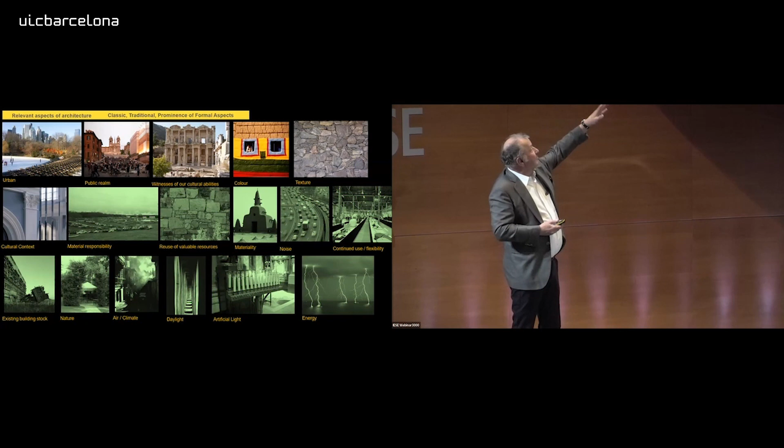Always, the public realm, that defines history. It also defines the cultural ability of a society, which often doesn't speak well for our societies right now. What was a society able to create? So public realm, cultural, the color and the texture of architecture - these were the basics architects worked with.

We developed further since the last 40, 50 years. We think also about architecture in context with nature, air, climate, daylight, artificial lighting.

And today we even develop further. We think about material responsibility, the reuse of materials, the materiality, qualitative aspects, noise, flexibility, reuse of buildings. How can we create less waste? How can we use the buildings longer and better? And then about using the existing building stock, urban mining, reusing of buildings, reuse of materials.

And then also how can we produce in the buildings our own energy? How can we get them ideally off the grid? And that is suddenly - architects are depending more and more on the interaction, the iterative process with engineers, the interdisciplinary working. It's becoming more complex, and we depend more and more on outside knowledge to help us develop that.

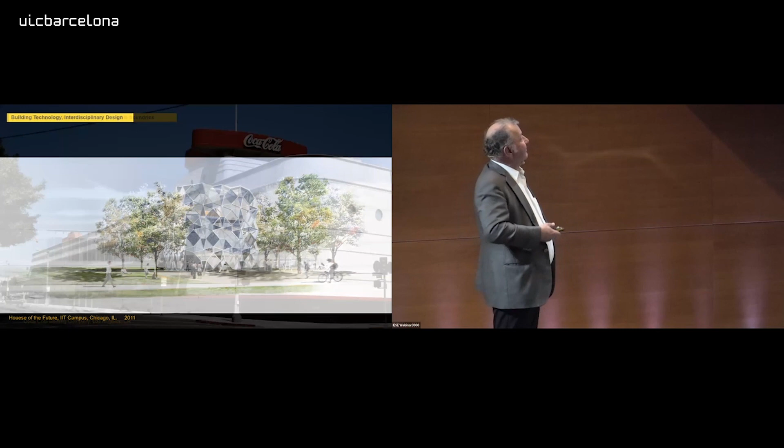Building technology, interdisciplinary design - that was something we did for the IIT campus in Chicago. They asked us, what could be the building of the future, the independent building of the future, off the grid, using only existing materials. This is just an example.

If you don't have content in architecture, if you don't look into structure, sustainability, usability, whatever, it becomes very formal and superficial. It's fun, but suddenly you can make it a boat, you can make it a ship, you can make it advertisement. And that's probably for nowadays a little bit too lame.

We work very closely with engineers in architecture. From the outset, already in the competition, we work together with our engineers - structure, sometimes urban specialists, sustainability, energy, climate, landscape, lighting design. It's a process from the beginning, it's not something we design and then give to the engineers and say make it work. It is a very interactive, interdisciplinary process from the beginning, and for that you need good engineers.

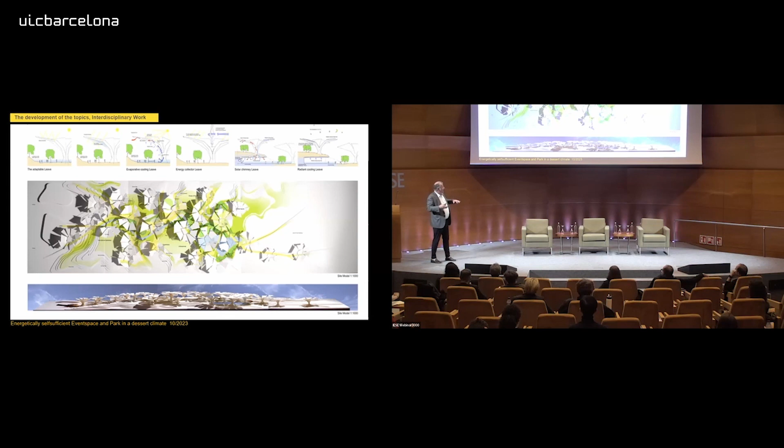Here's an example that was fun. We worked here with Transsolar and Neil Thomas from Atelier One in Britain. We worked on big umbrellas. A client wanted in the desert an off-the-grid open park with cooler temperatures and exhibition halls below ground. We found out even in the desert, 7 meters below ground, you have a very stable temperature of roughly 17 to 20 degrees, no matter what, day and night, 24/7 throughout the year. It works quite well, and we were able to develop these big umbrellas that cool down the air. It was fun, obviously never built.

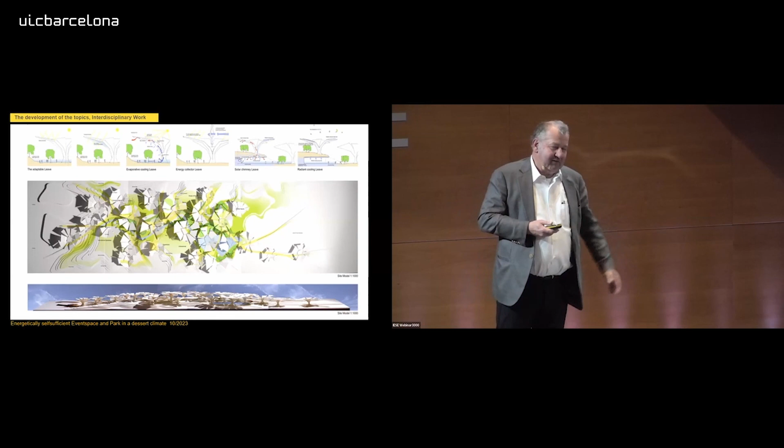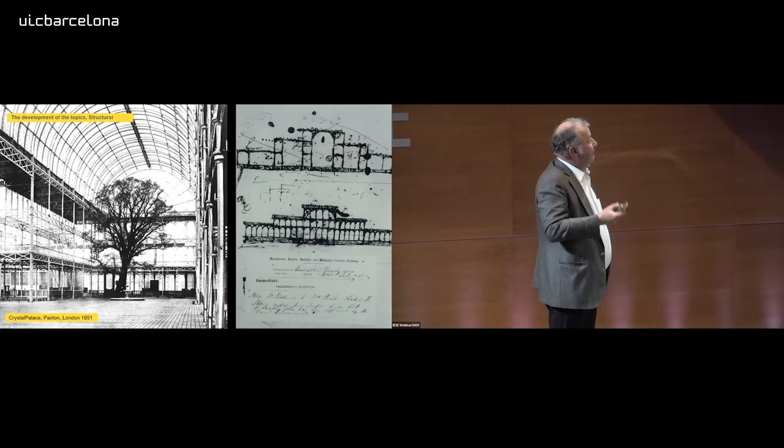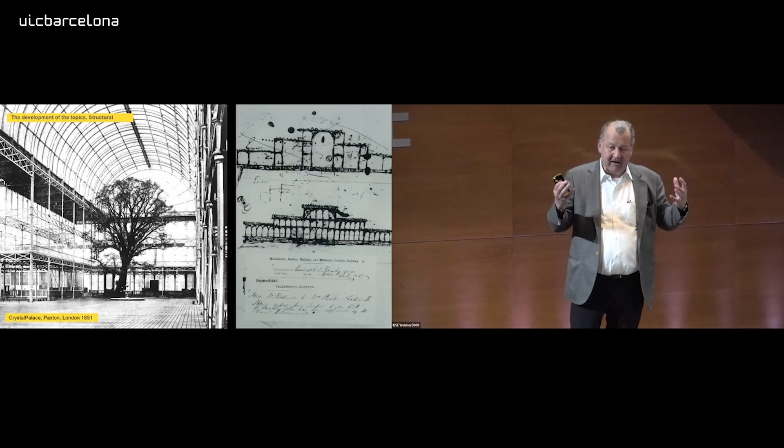If we go further, structure became a very prominent element in architecture. It expressed the architecture - Eiffel Tower, Crystal Palace. There was a new aspect in architecture that dominated the appearance of buildings. It made it very prominent. And it's always been in architecture that way: until we mastered a subject, it became the dominant element in the architecture, and then once the subject was mastered, it played its role and something new became dominant in architecture.

Here, also a different way of structure. Structure as a cultural element.

Now I want to talk briefly about a building my father did with the engineers Jörg Schlaich and Frei Otto.

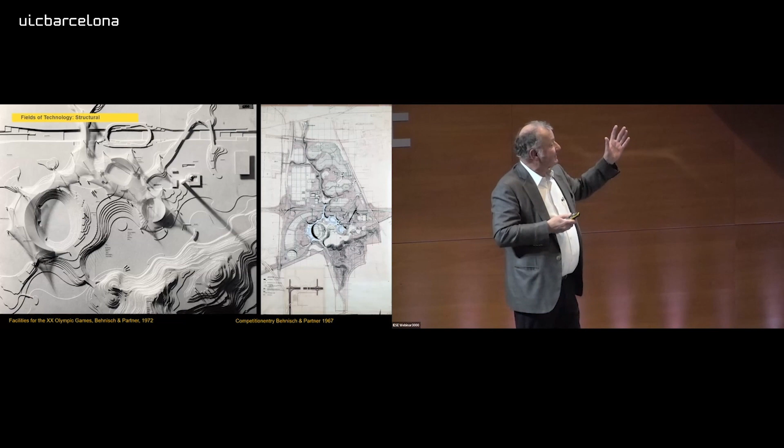The facilities for the Olympics in Munich. I'm showing this because this was right at the brink of something new, very new. It was when the computer started becoming an element in architecture. They had won the competition, and for a very long time, the state, the clients didn't know if they wanted to build the roof.

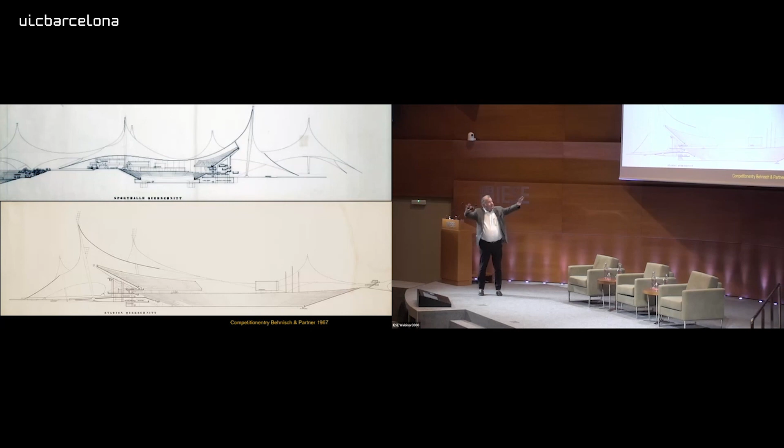They did different studies with different engineers and architects for alternative roofs. When they did the competition, and this is a competition drawing, the roof was never important for the architects. It was about the landscape, the Olympic facilities in the landscape.

Pretty much to the end of the competition, the story says, they said, we need a roof. We want open. They looked at earth stadia, amphitheaters. In Poland there were these earth stadia. They looked at that and said, that's what we want. And then they said, yeah, but it rains occasionally, we need a roof.

They used stockings in the model and just had this tent roof. They didn't know how it worked. Then it took a while, and just 3 years before the Olympic Games, they decided to build the roof.

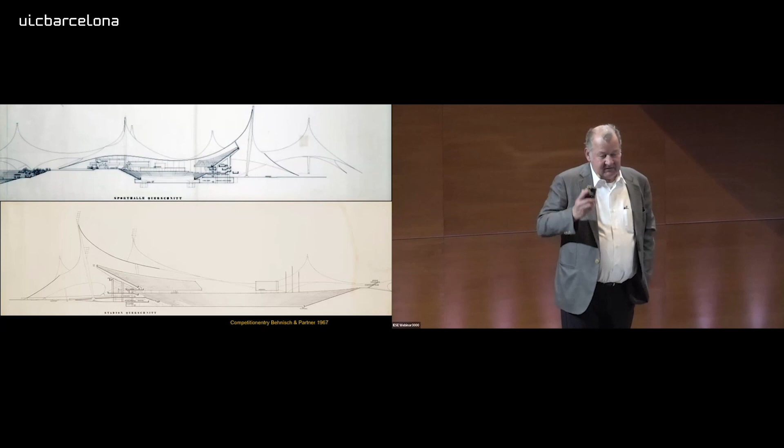The roof - here are the chain models, or physical test models, by Frei Otto. Some of the facilities were calculated by Frei Otto with these chain models, and some were calculated by Leonhardt and Andrä already with computers.

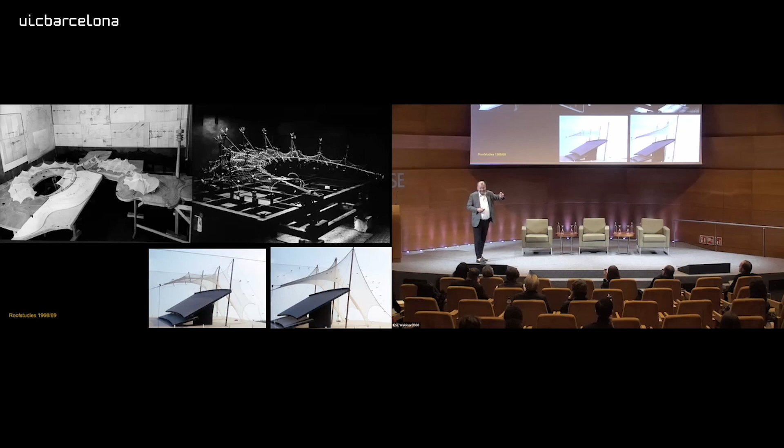They had a company in Stuttgart at the university, someone writing programs, computer programs for that, which were later used by Lockheed or McDonnell Douglas for airplanes.

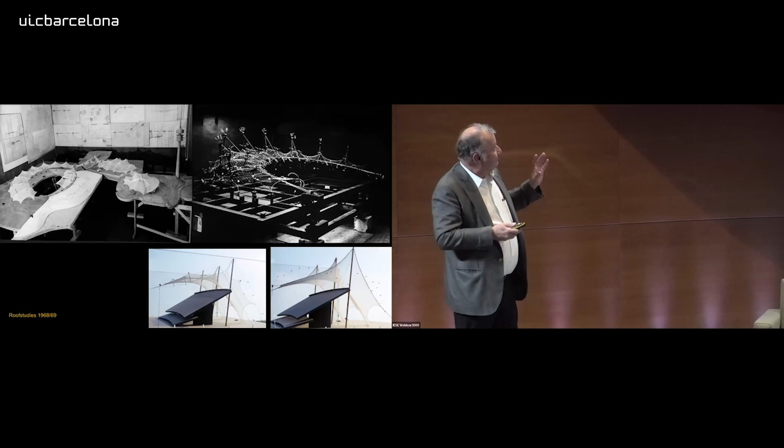And the challenge was, if you look at it, they had to build the tent at the ground. The net was built at the ground. They had to measure over 1 million knots by the millimeter, so that when the tent is pulled up, every knot is at the right place, and you don't have overtension in any place.

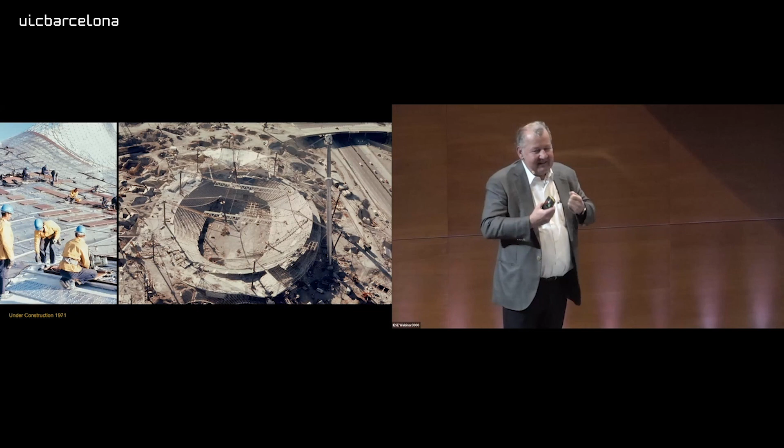So it was really amazing what they did in this very short time, and it worked. They couldn't over-engineer it, only by a little margin, because it would have gotten too heavy if they over-engineered it. They couldn't under-engineer it, obviously.

They had no experience whatsoever and had less than 3 years to do it. And they managed to do it. Just thinking about it, right now to build an airport in Germany takes 12 years or something like that. And they were able to do that in 3 years.

That's pretty amazing. But that was a very close working relationship between architect, structural engineers, and very good clients. There were 3 politicians from 3 different parties. There was Franz Josef Strauß, very conservative, Hans-Jochen Vogel, SPD, socialist, the mayor, and Willy Brandt, social democrat, chancellor.

And these 3 said, okay, we dare it, we'll do it. We make this decision. Politicians who were willing to take the risk. And it worked. It was worth it.

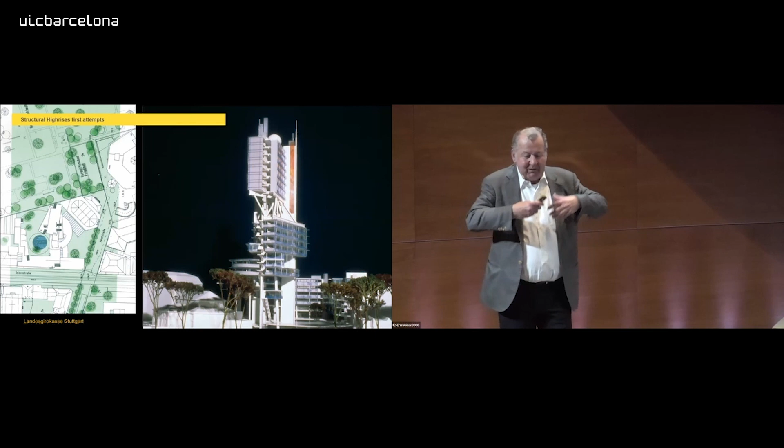So why can't we do a high-rise building that is dancing on a foot or on a toe? Playing with the structure. So we designed that. We won the competition, started working on it, then it was stopped.

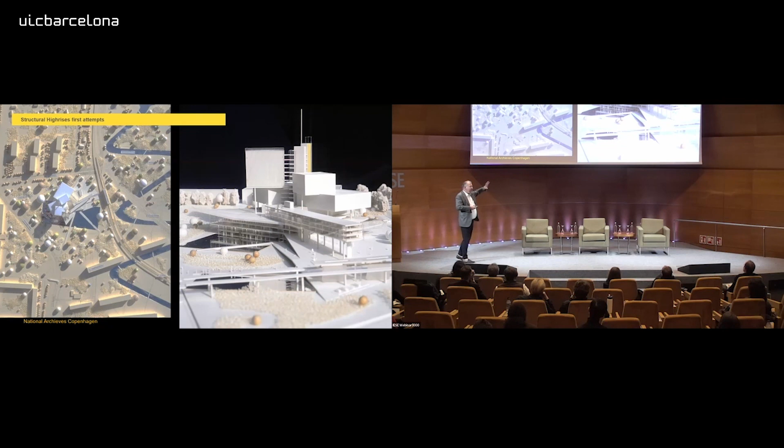The next one was even wackier in a way - the National Archives in Copenhagen. You don't see the size of the building, but the archives alone were more than 90,000 square meters. It's a huge building, huge.

And we won the competition, we designed it. We had the structure, a steel structure, already in place. And then they stopped it. There were elections, a very conservative government, and they stopped all foreign projects by foreigners. Boom, zack. And then, finally, we were able to build it.

Interestingly, though, we won the competition with a rather almost lame block, without this high-rise part, just a block. We won that competition, and then we were lucky after reunification in Germany.

They wanted - this bank, Norddeutsche Landesbank - wanted to merge with the Berlin bank, but the Berlin bank went under in a scandal, so they couldn't merge. So they needed more space. And they asked us if we could add another floor, and we said, nah, we can't really do that urbanistically.

But we have the idea of a high-rise building there. And they asked how much will it cost? We calculated something. They said, okay, we'll go for it.

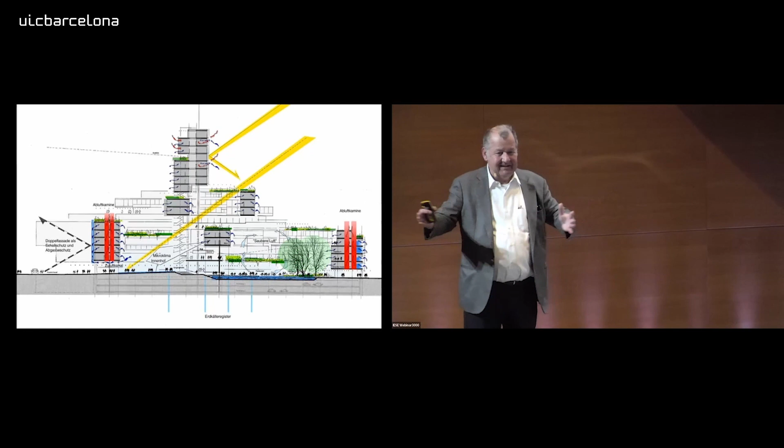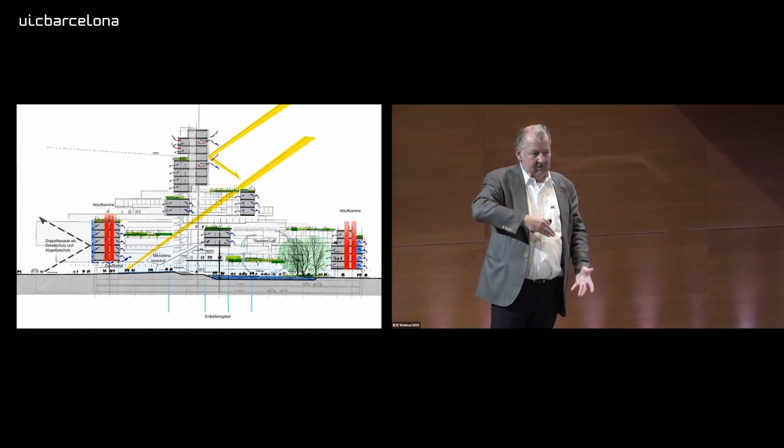The building itself is very sustainable in a way, technically. It has geothermal wells, not very deep. And because they built the subway next to it in the 60s, the groundwater table can't move. It's caught there, so we have a huge seasonal storage under the building, which we heat up in summer and cool down in winter, counterbalancing it. That covers 70% of the heating and cooling energy, but cooling is only the tower. Here there's no cooling, it's all natural ventilation through chimneys.

It's a very low energy building for that time. Today we could do better, with natural ventilation, with a double facade here. These are the chimneys of the floors, they are located here. But let me get back to the structure because that's interesting.

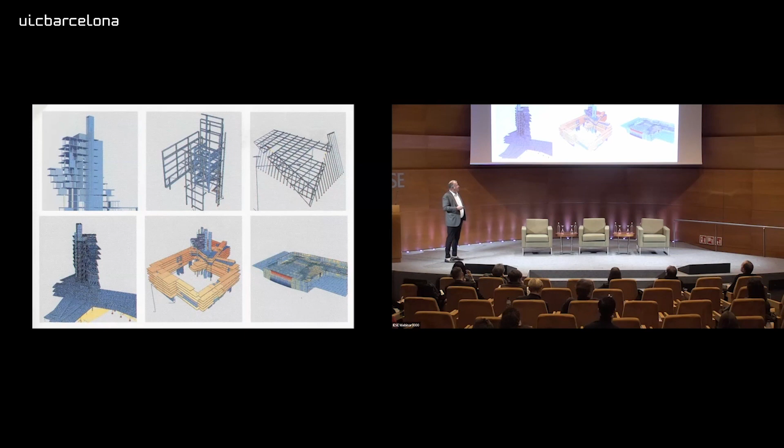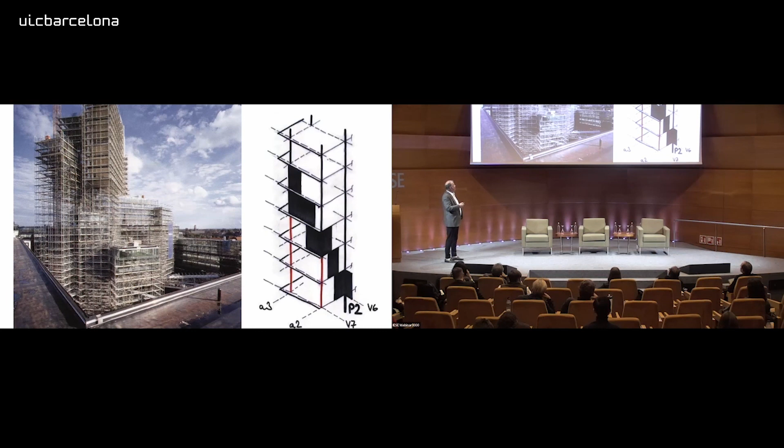The building is structurally a concrete composite structure, high density concrete. And since it cantilevers so far, it has these shear walls pulling it back. Here you see the shear walls pulling it back. What is interesting is the whole thing is balancing on these two columns here.

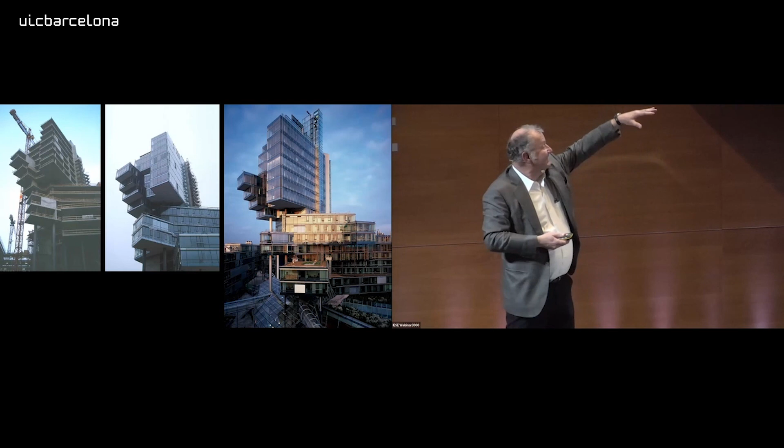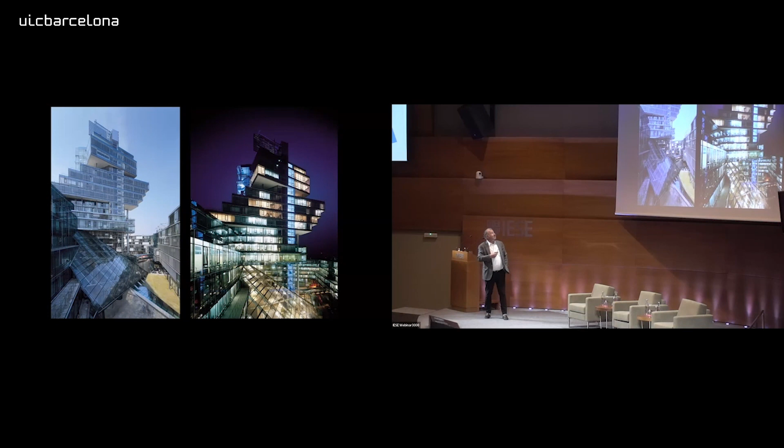The structural engineers always told us, you need a little bit more weight in the back, you need to add a little bit of floor in the back or the bottom. It's really balanced. These two columns need a stable temperature because it's cantilevering so far that even if they only extend by 4 or 5 centimeters, the pens would roll off the tables in the high-rise building. So it's a very stable temperature element in there, they can't extend, shouldn't extend. Here you see how they say, oh, we need more weight back here, or we need a little bit more front here.

Now I'm going away from structure, to another aspect. This is the Genzyme headquarters in Cambridge, Massachusetts. We worked here with Buro Happold on this building. And the building is a low energy building, comparable.

But it doesn't really matter how much energy it uses, because this is a power plant, and we were able to use the cooling cycle of the power plant, which normally just dumps the heat in the water, to heat and cool the building with absorption chillers. So it's a net zero building, to be honest, because instead of heating up the river, we heat up the building. That's the only difference. So that's an aspect that is very important.

Where is the building? What is nearby? We've done something similar in Bavaria with a city hall, where close by is a commercial laundry that creates a lot of hot water. We can use that hot water to cool and heat the city hall instead of dumping it in the rivers.

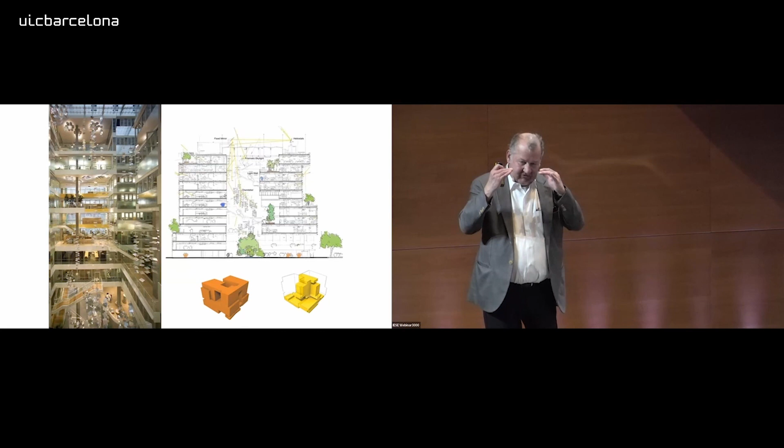That's the building, and the building itself, because it's such a deep floor plate, has a natural daylight enhancement system. We have 7 heliostats on the roof that catch the light and reflect it into the depth of the building. The quality of daylight, though, is the change. It's not just because it's daylight - you can artificially reach almost the same quality of light as daylight, but the change, the clouds, the trees, the colors changing, that's different.

Once you reflect daylight with heliostats, it's canned light. It's static, it doesn't change anymore. So we developed these chandeliers in the middle that turn in the air return of the atrium, changing the light sensation in the building. So suddenly you have the feeling of daylight again.

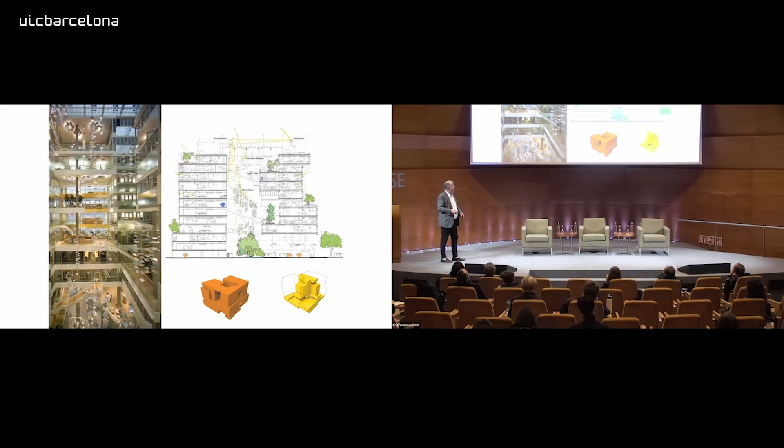Another project, also done with engineers, friends of ours, very interesting. It was a competition, we didn't win. They wanted a drawbridge in Dublin. Now everybody thinks drawbridge like that - we said, nah, it's not really good. It's a lot of power you need, a lot of strength, you have to over-engineer it just to pull it up. How can we let the bridge dance to the side, move without effort, like a dance?

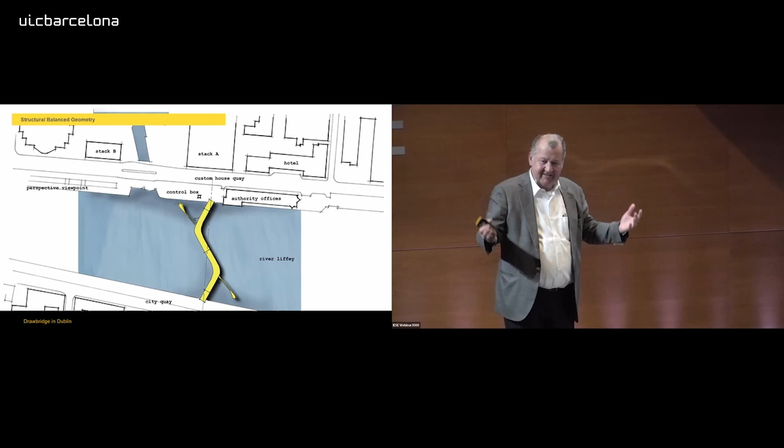And so we developed a bridge that turns to the side, dances to the side, and also balances by dipping these counterweights in the water, balancing it out with the water. You see it here.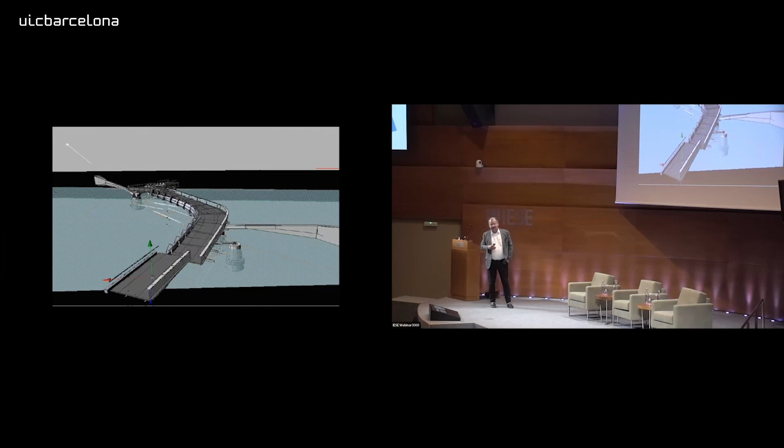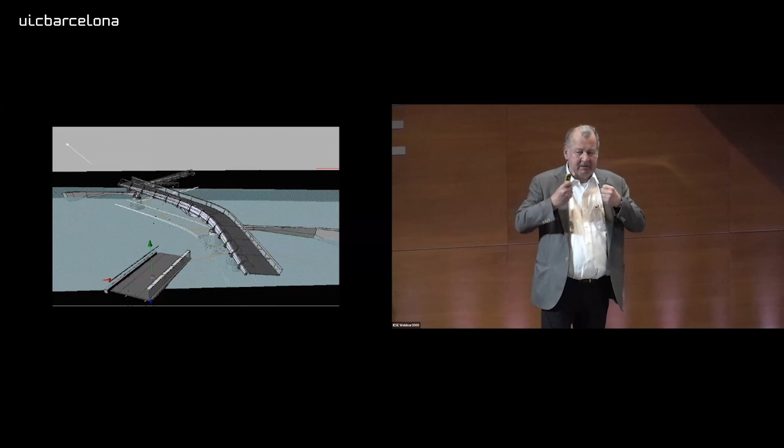That was old and crude, not rendered. But the idea was, can we move a bridge without power and effort? It should work with a push of a finger to move it, not have these powerful things. We didn't win though, I think they didn't believe us. But it was fun to do, with very good engineers.

Another one. Now I'm talking briefly about wood, the qualities of wood in architecture. This is the conference hall of the World Intellectual Property Organization, a United Nations organization for the protection of brands and intellectual property.

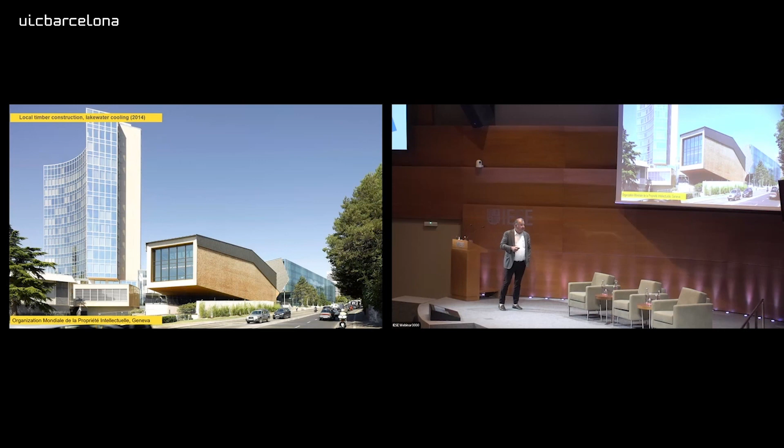We did this administration building for them, and this one. When we started, we were in the midst of designing that, 9/11 happened, and suddenly bomb blast became an issue also there. How can you do that? That's why this wall is here.

We decided to do a wooden structure here, a conference hall for 1,000 people, for various reasons. One reason is we had just finished a parking garage below the building when they decided they needed a conference hall, so weight was a big issue. We also wanted to do a very sustainable building, so wood from the area, not more than 100 kilometers, was an issue.

Third, a conference hall is usually used at a maximum of once a week, so you don't want a building mass. What you want is a climate that slides—it cools out, it heats up, it doesn't matter, because right before a meeting you can easily heat it up or cool it down, without a big building mass to carry or pull along. So wood is ideal because it's light and doesn't have building mass. And the last aspect is wood is structurally far better than any other building material we have.

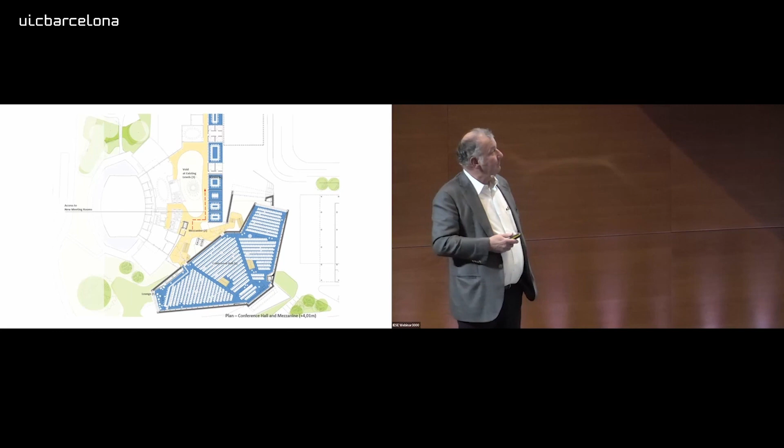The hall itself is for 1,000 people. It's a free span, and here it cantilevers 40 meters. No other material could have done that without a huge effort. With wood, it wasn't a problem because we created a closed box.

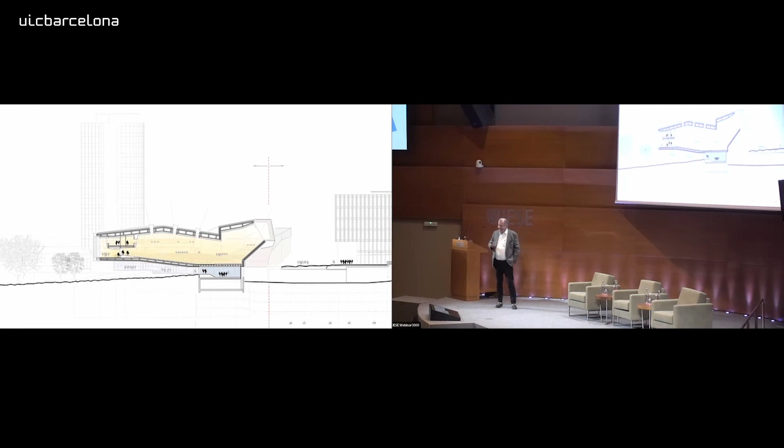What you see here, the open elements, we blow air through for the air conditioning, so it's always kept dry. This is a free cantilever—you don't see it in the section, but there's a concrete column that holds it, and then it cantilevers free. Another huge advantage of wood is bomb blast: it's far better than steel, glass, brick, or concrete, because it's elastic.

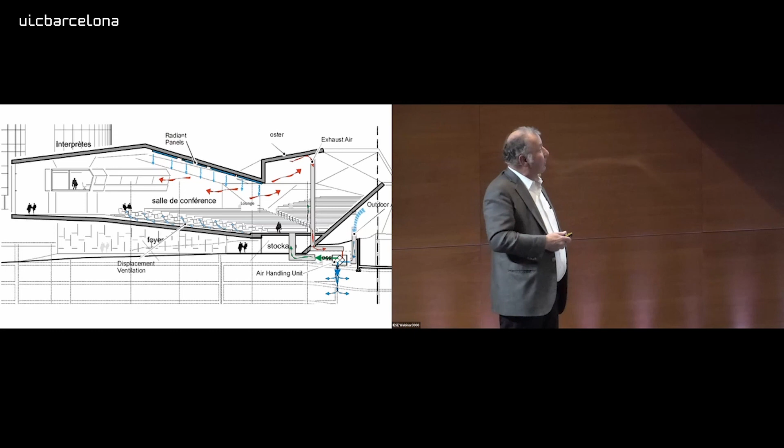This building is also cooled with lake water. Lake Geneva is very deep and has low temperatures at the bottom, so there's a water tube going there. It's a full CLT structure with only steel joints, partly prefabricated and brought there. So everything—the structure, the interior, everything—is wood in this building.

What you see here, these Sputniks, we designed—we designed the tables, the chairs, these elements. In conference halls, the ceiling is usually cluttered with loudspeakers and all this kind of stuff, but here it's all hidden. You only see little cameras and some microphones hanging.

The tables and chairs we designed because the depth of the table is a given, and the depth of the seating area of the chair is a given—they move automatically. The only thing not a given is the depth of the structure of the chair. By designing new chairs, we were able to save 2 centimeters, which gave us one more row, 89 seats—just from the 2 centimeters of the chair.

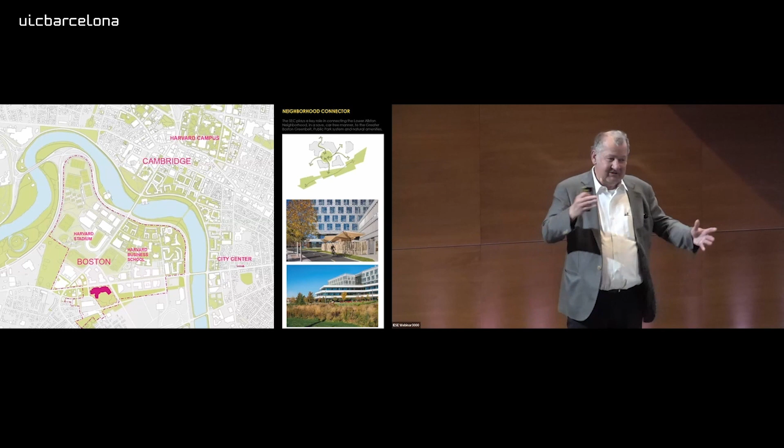And then 2008 came. And 2009, they put a stop to the project. And we had for 3 years to babysit the basement because it had to be kept an open construction site. And 2011, they came back to us and said, we want you to proceed, but totally new program. Completely new design, on the old structure. It was incredibly expensive because we had to change the structure below. A nightmare, but a very good client.

So what you see here, originally it were 4 buildings, 1, 2, 3, 4. And you see here the old cores still - stairs, elevators, everything - because they want to be able to expand here later on. But this alone was as big as all 4 before. So it's a major building.

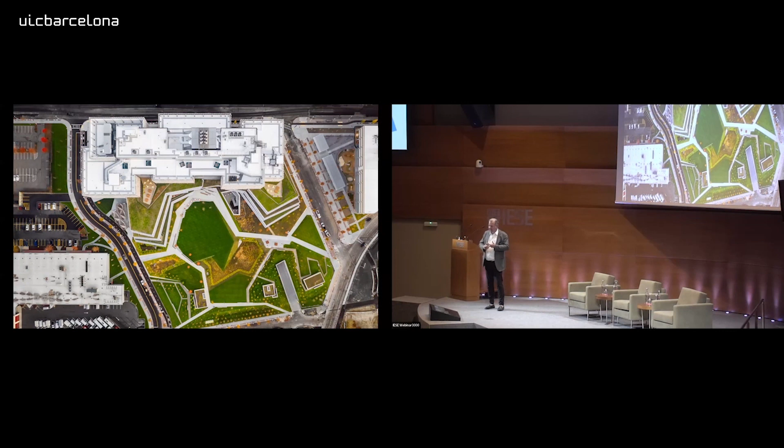It's a school, SEAS, School of Engineering and Applied Sciences. It's a very broad approach to School of Engineering. When we think School of Engineering, we just think machinery, structural engineering, or whatever. Here we have medical in there, bioengineering, robot programming, clean labs, wet labs, dry labs, computing, whatever. So it's a very broad, interdisciplinary approach to engineering.

And that's the building. Harvard said, we want a building that is very sustainable. Before they stopped the project, we even had test drilled for deep heat mining there. We went 4 kilometers down with a drill to see if we could produce energy, if we could get enough steam to produce energy. And then after 2009, sadly, they put a stop to it. It was too risky.

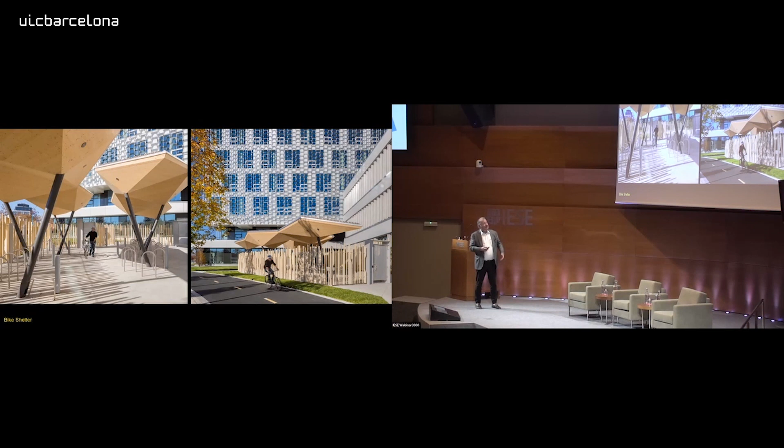But here's the bicycle rack, a wooden structure. The most complex bicycle rack we at least ever did. But it was interesting, and we wanted a contrast. It's part of the landscape.

Here, this is the school, the teaching part. It's 4 floors - 2 below ground and 2 floors above ground. It's altogether about 60,000 square meters, the building.

What they wanted is, as I said, a low energy building, a high-tech building, not low-tech, a high-tech building, but low energy and as efficient as possible. So we have different things there.

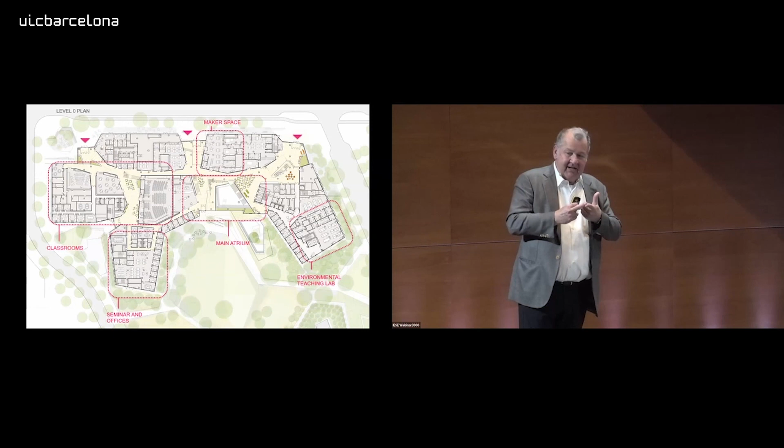It's a living building challenge was the basis. That means for all interior material, we had to check the supply chain. No poisonous materials were allowed, no materials based on poisonous construction, and so on. We're only allowed to get 15% of the materials - and this alone is LEDs, lighting, and building management system. There you have already your 15% of poisonous material used up.

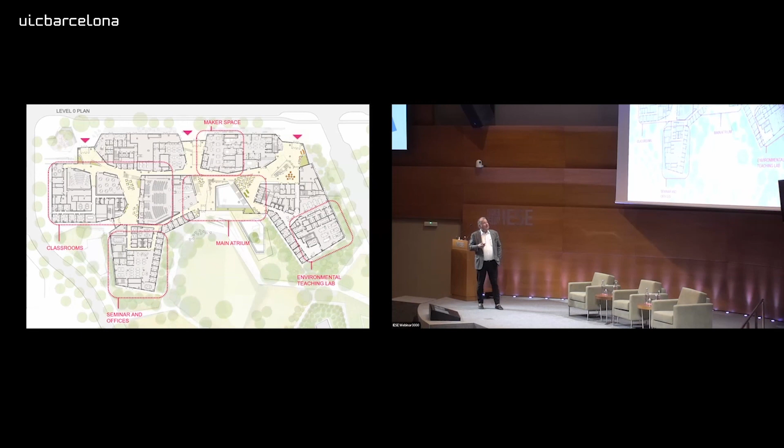So living building challenge: low energy cooling, low energy heating, and daylight enhancement. I'll come to that, I'll explain that in more length. These are the teaching labs, the maker spaces, the main atrium, which is also important for the climate system.

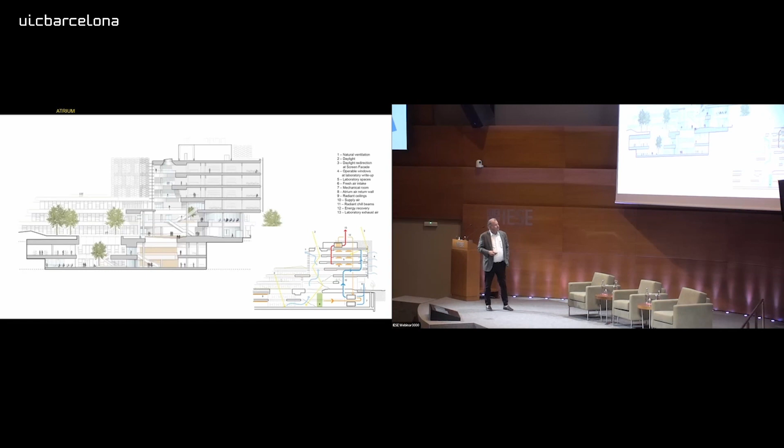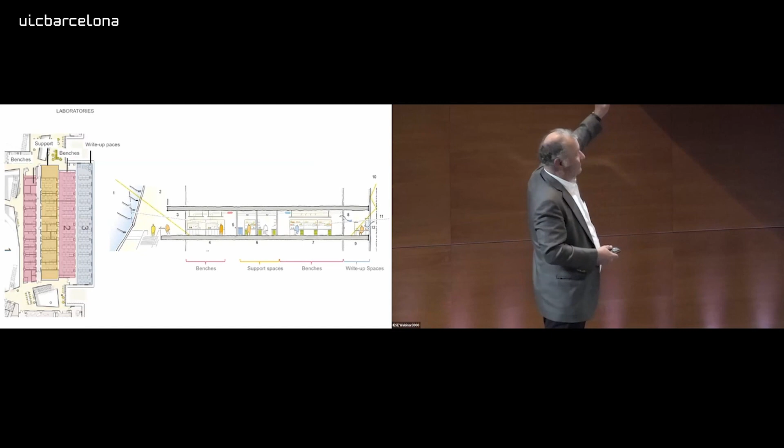These are research labs. That's a computing lab. Most of the times people want these rational labs, these very technical labs like these ones - that's what most people want.

And here we had a teacher who said, why are labs always so boring? Can't they be different? And we say, sure, happy to. And so we developed these kind of labs for them. They wanted more openness. These are the robotic research labs with office spaces. Here you see regular labs, wet labs.

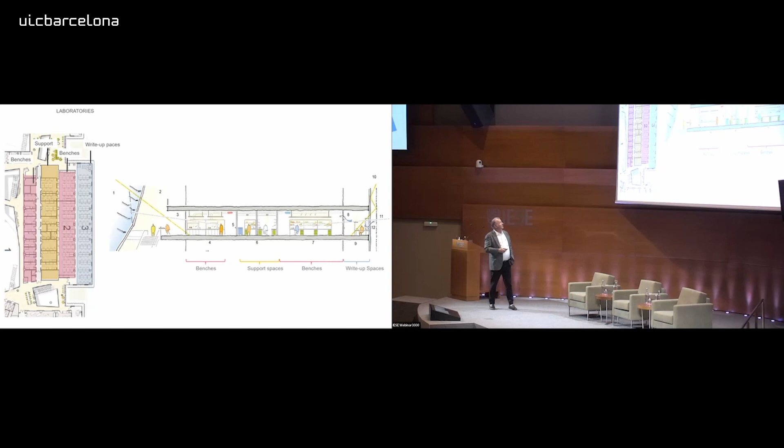So it's not a guarantee for sustainability. The living building challenge is more difficult because it doesn't look only at quantities, it also looks at qualities - light, daylight, materials, water usage, there is everything in there. Far more complex than LEED, for example. The building is LEED Platinum, but also living building challenge.

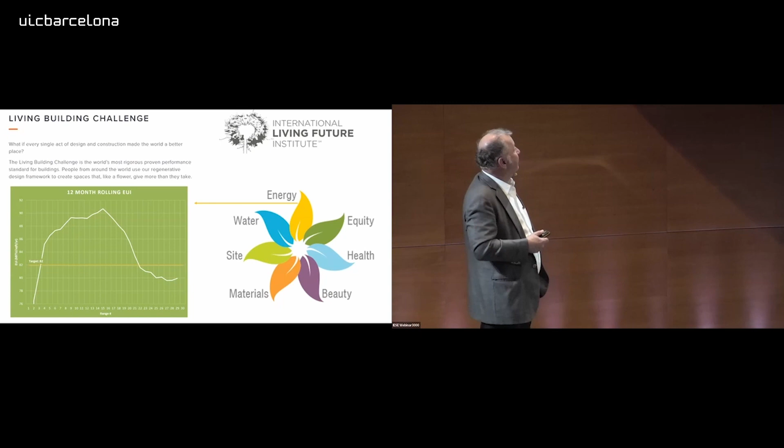The energy consumption of the building was way below what we had expected. The water cycles, I don't go into that, but it's flushing toilets, it's watering the green, the outside. It brings the water to the HVAC system and so on. So hardly any water goes in the channels.

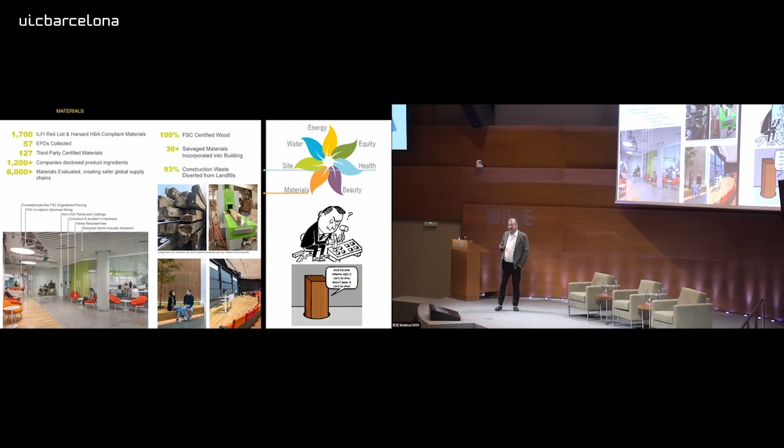Reclaimed wood, reclaimed materials. It seems not much, but on a building that size, it's a lot. Generally, laboratory buildings are energy hogs. They are pigs, they use a lot of energy. To save 50% of energy in a residential building is great, but doesn't make that much of a difference. To save 30% of the energy in a laboratory building makes a huge difference.

And now let me talk briefly about the shading and daylight enhancement system. We all know that shading is a major issue in buildings nowadays, because cooling in summer uses a lot of energy. And we know, for example, a building 3 degrees Celsius cooler in summer just doubles your energy use. Just 3 degrees. So whatever you can do to avoid overheating is good for a building.

We normally use a lot of movable blinds. The movable blinds are a good idea because you can tilt them, you can reflect daylight in. What we tend to forget is movable blinds have - let's say an office building of 40,000 square meters has around 1,000 motors for the movable blinds. Each motor is about 60 watts, so we are talking about 60 kilowatts. That means you can't even close or open them all at the same time without the whole electricity failing in the building. So we tend to underestimate the complexity of it, not talking about breaking, repairing, fixing, and so on.

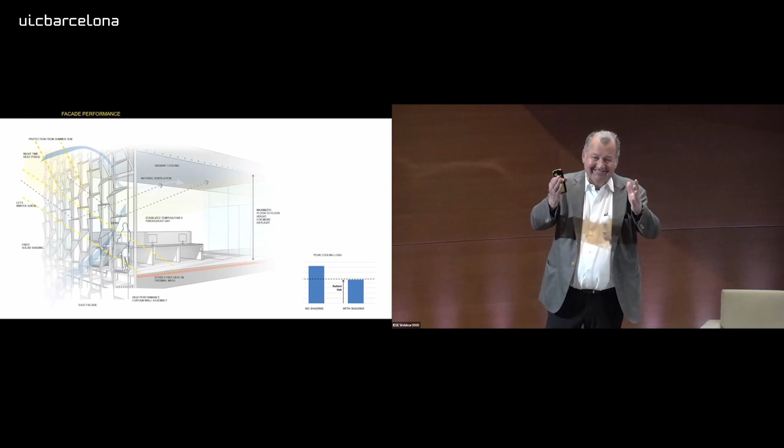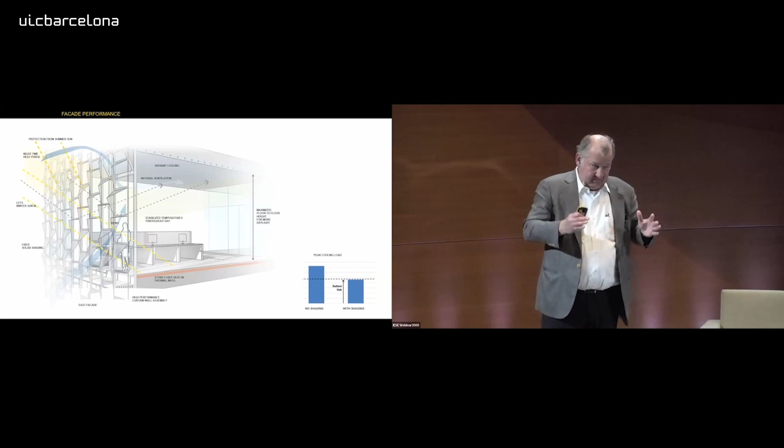We designed that and optimized it. And the next challenge is you want it in a way that you still can look out, the visibility to the outside, because movable blinds usually block out your view to the outside. So we wanted to keep the view to the outside, not disturb it too much, and as I said, reflect the daylight in.

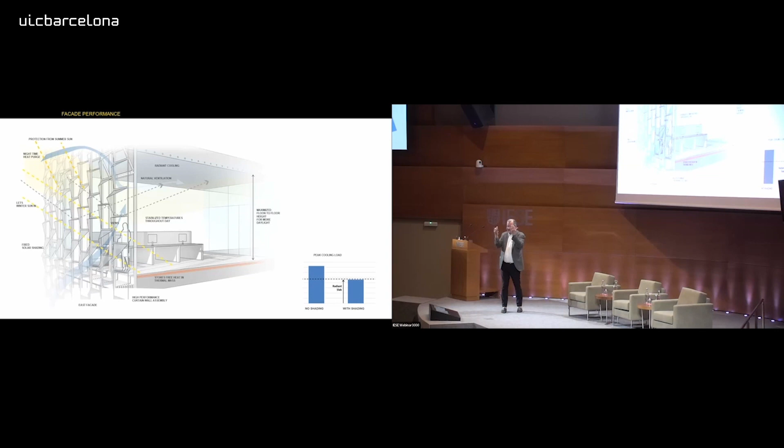And very important, contrast is very important. That means when you look out, you don't want bright and dark next to each other. We all know that when we look in summer through a window with a closed wall left and right, it's very bright. So contrast is important - how can we minimize it? We worked on that in many different ways.

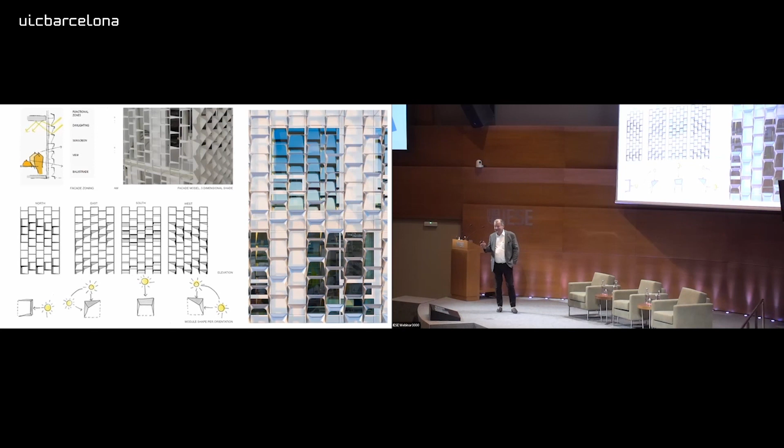We approached it first with folded metal elements. And then we noticed when we went through the construction documents, we had 14,000 of these elements. So we couldn't do them by hand - we could, but it's not fair. So how could we approach that?

So depending on the side of the building, the direction of the building, and depending how open we want it - because where you look out, we wanted to open it up - but you can scale it. If you open it up, you have to make it deeper. So it's scalable. And architecturally, we wanted it also to be pleasing - I mean, why not?

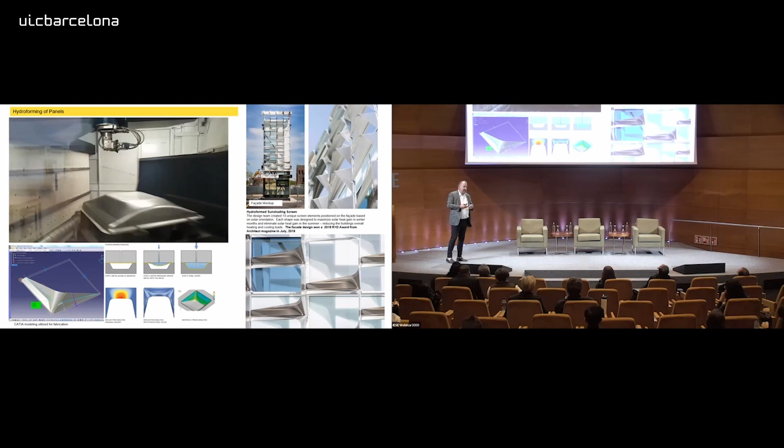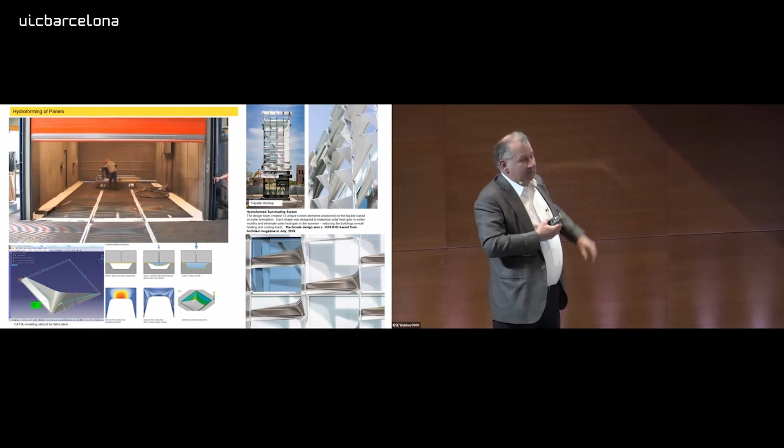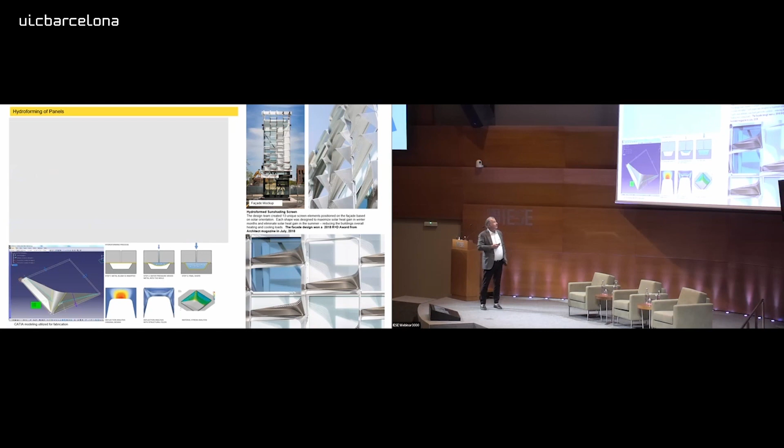And this is the production process. We optimized it in a way that we needed only 4 different forms, and the rest is done with laser cutting. And this is the result, how you can look out, and it works very well with the sun shading. It's funny, or interesting - it is not a complex device, but it's a very complexly designed, engineered device. The device itself is harmless, but the engineering was very complex, and it works very well.

So as you see, nowadays, if we want to address our challenges, buildings don't need to become very high-tech, but what they need is to be very high-tech designed, very knowledgeably designed. They are more complex in design, but if we do it right, less complex technically. Thank you very much for your attention.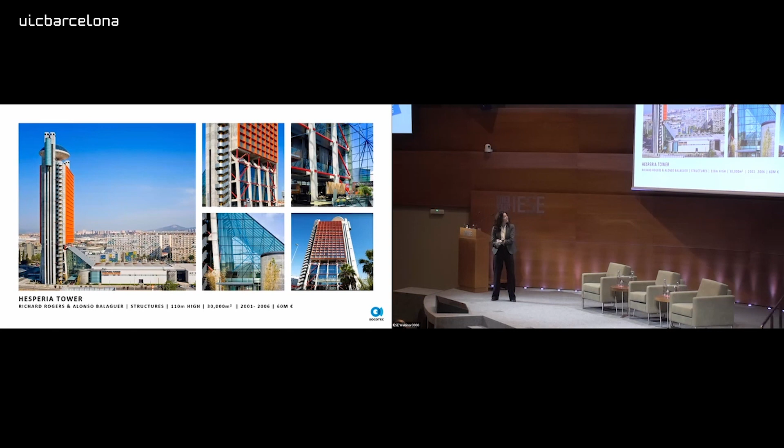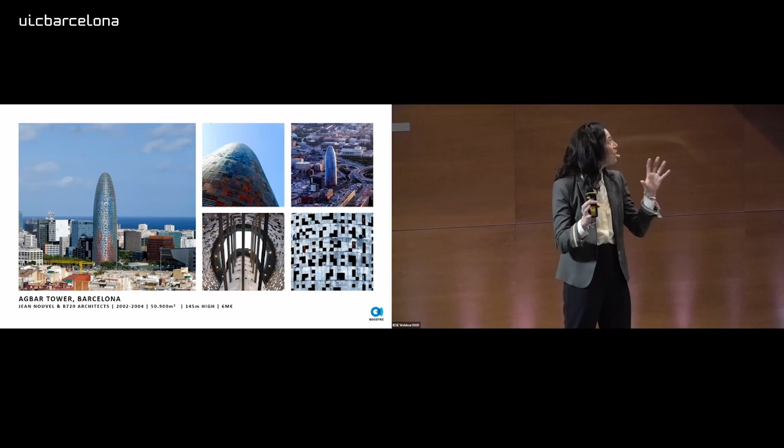I personally worked 3 years on this project, hand by hand with the Jean Nouvel Atelier. It was really amazing for me personally, designing all the windows and understanding the best position of the windows, of the light. It was really, really amazing.

This is a work that we did for Richard Rogers, the Hesperia Tower, also an amazing building. That was another crazy building.

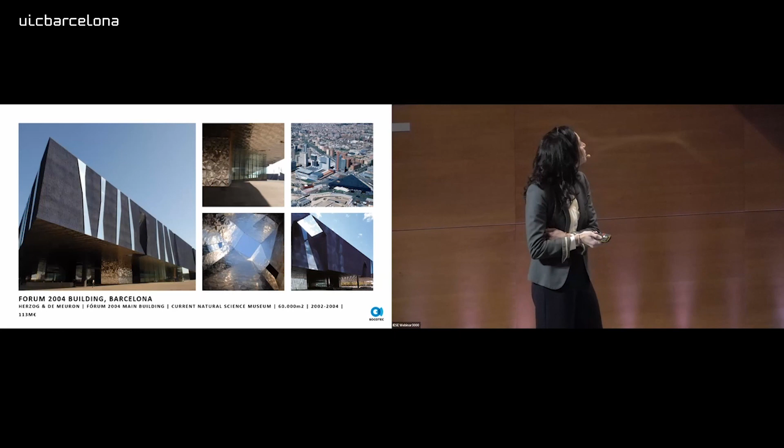And experience for our teams in Barcelona, the Forum building with Herzog de Meuron. This slab was 36 meters, so it was really an important engineering and architectural collaboration between architecture and engineering.

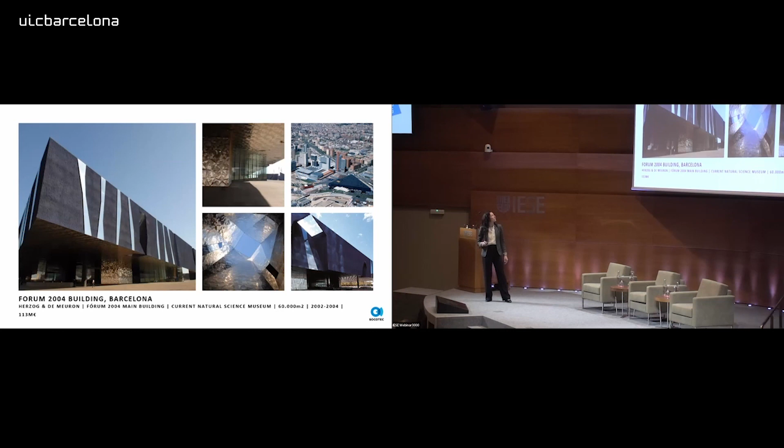It's hand by hand, day by day, arriving to the optimal structures. This is another hotel here in Barcelona with Dominique Perrault.

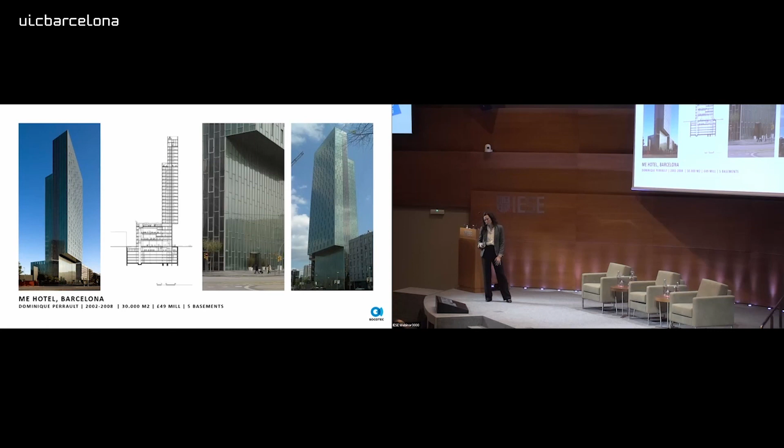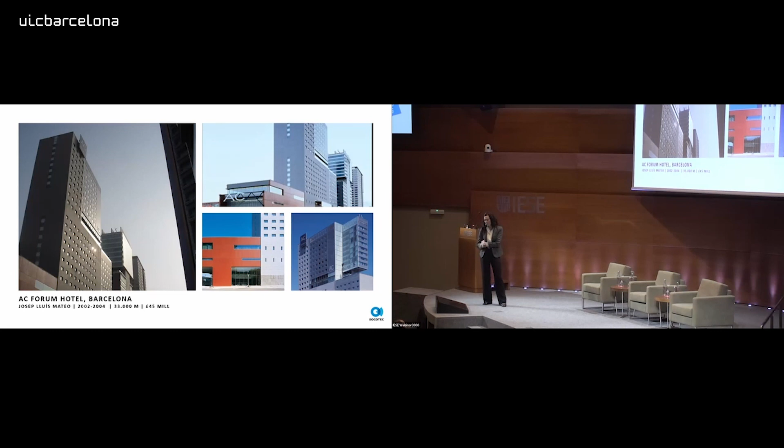And the Justice City project was in collaboration with David Chipperfield, and another hotel here in Barcelona with Lluís Mateo, another office.

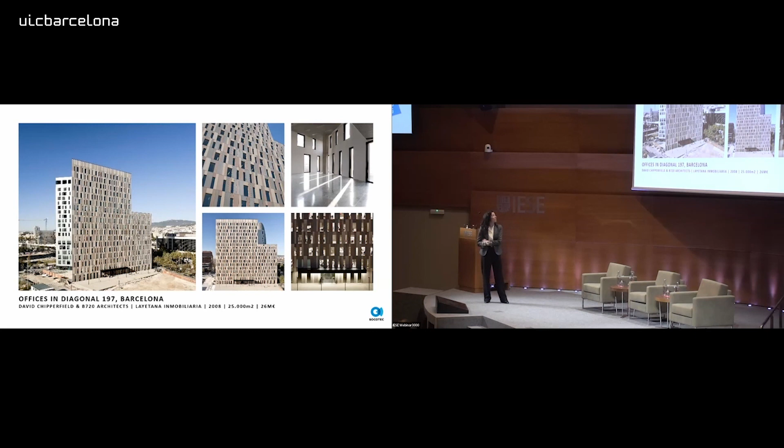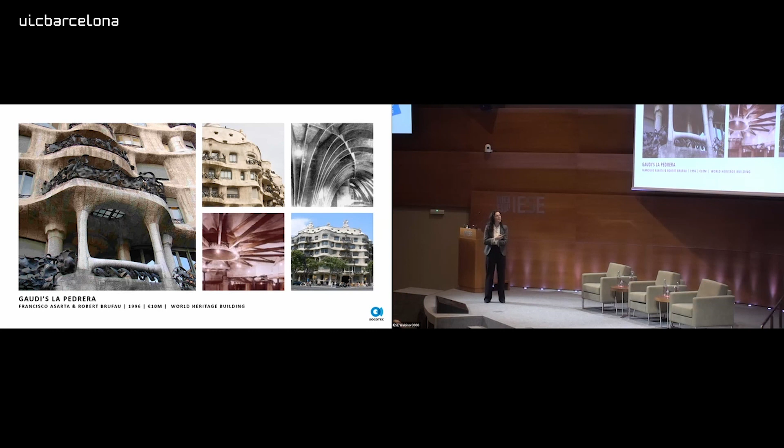Then we did a lot of projects in heritage and refurbishment. As you can see, we had a lot of fun in our work, from the Olympic Games to around 2005. We also did several footbridges, and this is a project we currently have under construction in Malta with Zaha Hadid.

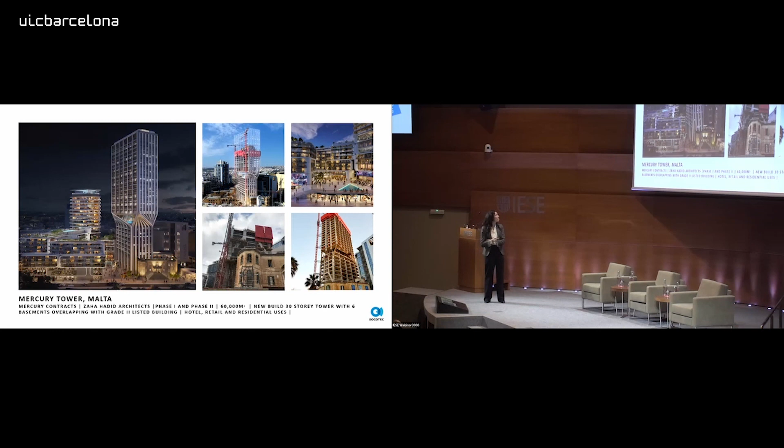Now we have new challenges. In the last 30 years, things are changing a lot, and we need to face all together, architects and engineering, the challenge of the transition in energy. So now we are trying to approach every project in a holistic way.

30 years ago, there was high tech, there was a material, and there was a geometry. The materials were more or less the same, steel or concrete, and we worked over the geometries. But nowadays we need to approach the project in a really holistic way with all the engineering specialties, so structures now become a visual, acoustic and thermal protagonist of all our projects.

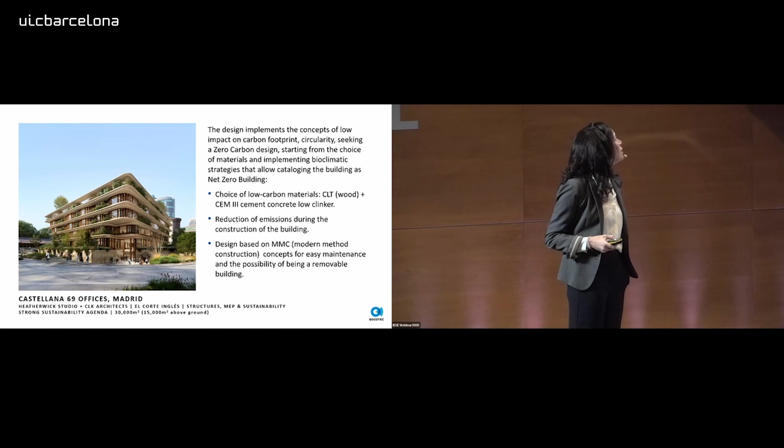It's in Madrid. The architects are Heatherwick Studio and CLK Architects. It's really challenging work for us. We are implementing the concept of low impact and circularity, and we are trying to arrive at zero carbon design.

We start from the choice of the material. Finally, we use CLT wood everywhere, and the cement of the concrete is low in clinker. And we use a lot the design based on MMC.

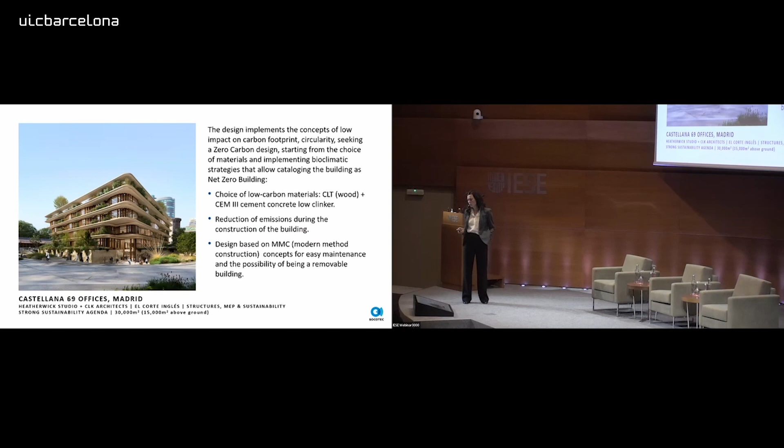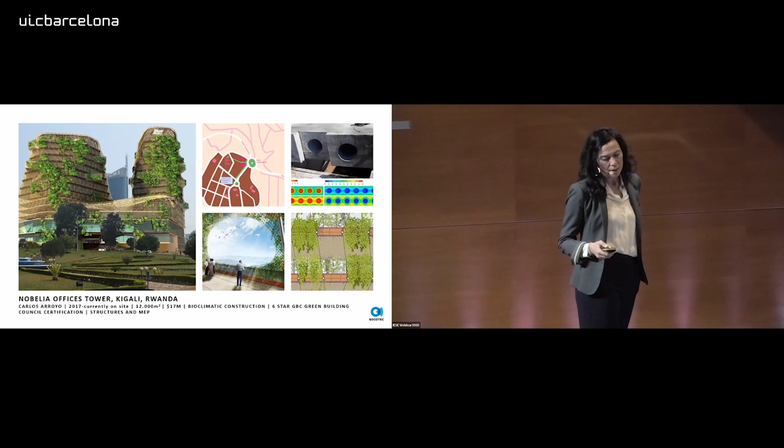So I will try to resume in this trilemma the problem that I think we have. I think it resumes a little bit what Stefan has explained at the beginning of his presentation, that we often have three poles that stress the way to solve our problems. On one side we have the economical needs, political needs, and the society needs that want one thing, and good clients, bad clients, as Stefan said - of course when the client is a good client, it's always easier.

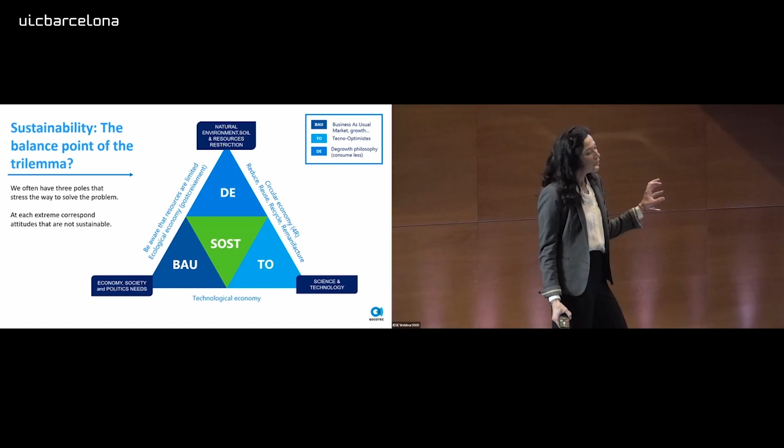On the other pole, we have the restriction of the environment, the soil, the resources, and the ecological movements. And on the other side, we have the science and the technology that are always positive in general. So at each extreme, I think that the attitudes are not really sustainable.

So sustainability, I think, is a trinomial that's in the middle, because if you go more into the political problems, the way to go ahead is business as usual, the increasing economy. Then we have the degrowth philosophy of the ecological movements, and then we have what I write here as techno-optimists, because the technology says yes, we can resolve everything with technology. But I think that if we can try to arrive at a good equilibrium, of course the politicians need to help us.